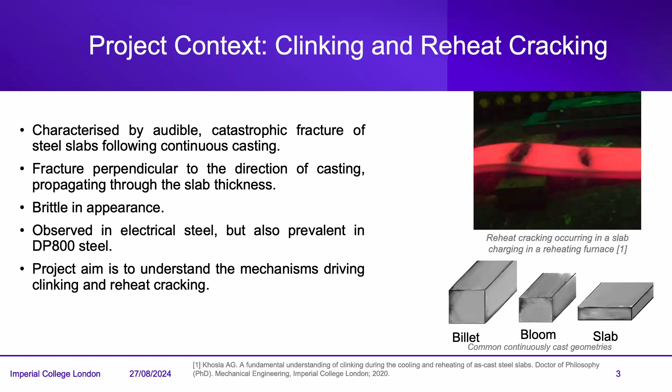And the aim of my project is to further an understanding of these mechanisms that result in clinking and reheat cracking. So, as I mentioned, the phenomenon happens after continuous casting. There are a number of process routes that a slab can take once it's out of the continuous caster. You can hot charge it and keep it at a temperature above its transition temperature. But clinking and reheat cracking often occurs when it's either cooling down in a slab yard or being reheated in a reheat furnace.

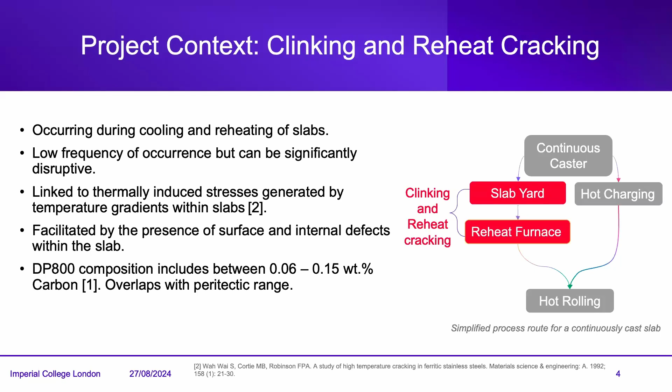So it has been shown that clinking and reheat cracking is linked to thermally induced stresses due to non-uniform cooling within the slabs. And this has a low frequency of occurrence, about 1 in 1,000 slabs or thereabouts. But when it does happen, it can be quite significant. Another factor to consider is that there are casting defects introduced by continuous casting that can be exacerbated by DP800 steel's composition, which can overlap with the peritectic range.

So a bit more about continuous casting. Essentially, you're taking molten steel, you are putting it into a water-cooled copper mold, which initiates the solidification process, and then this is extruded out as the solidification continues. It's guided through. When the solidification is complete, then it's cut to length. And due to the nature of continuous casting, you end up with an extremely anisotropic microstructure.

So on the outside, which cools the quickest, you have the chill zone with the smallest grain sizes that are randomly orientated. But as you move further in, you encounter the columnar zone, which has textured grains that are aligned with the direction of heat flux. And in the middle, you have equiaxed grains, which again are randomly orientated. Grain size wise, you have the smallest grains in the chill zone. The largest grains generally I've found are in the columnar zone, and in the middle, you have the equiaxed zone.

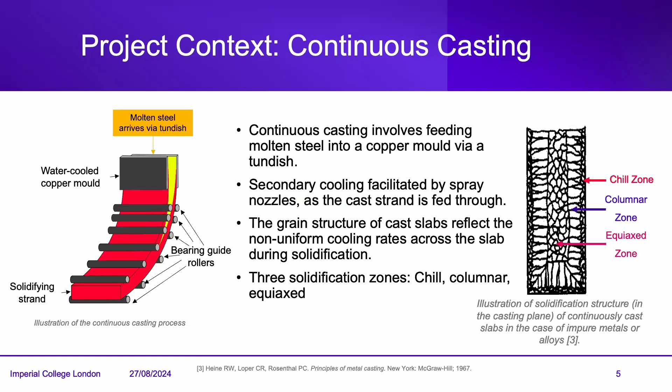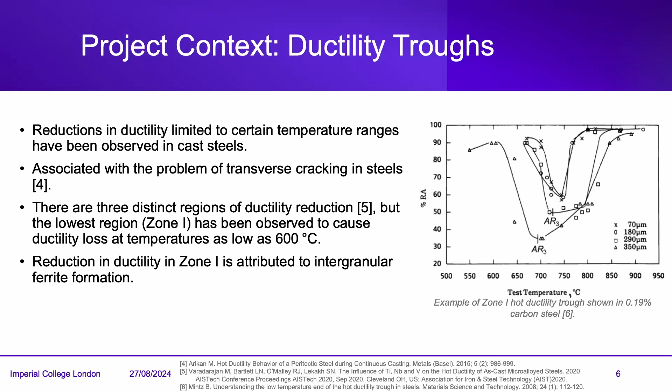Another thing to take into account is the appearance of ductility troughs, which have been known to occur in certain cast steels. Now, these are characterized by a reduction in ductility in a temperature range. There are multiple zones for this, but the one probably of most concern is in the lower temperature range, because this can be as low as 600 degrees. And these can be attributed to ferrite formation upon cooling, which then preferentially deforms and forms voids, which then coalesce and cause intergranular cracking, but it can also be due to grain boundary sliding.

So to summarize the context, you've got a peritectic composition from DP800 steel, anisotropic microstructure due to the nature of continuous casting, which can also introduce casting defects into the material. And then you've got a ductility trough at certain temperature ranges. All of these are interacting in a slab, which is subject to thermal stresses upon cool down or reheating.

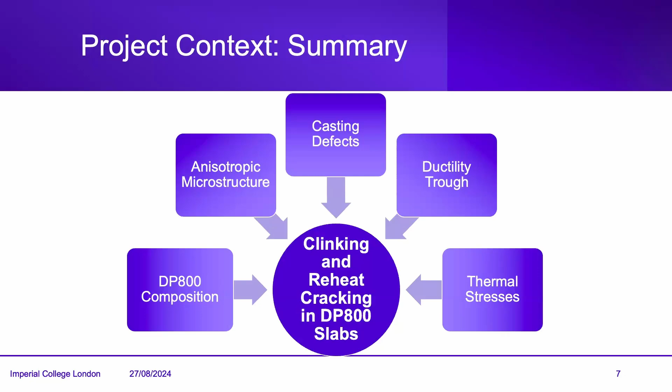So before looking at the fracture toughness properties, it was important to observe the extent of the solidification zones that I've just discussed. So some metallographic work was conducted, and quite a large area of a DP800 steel slab was polished and etched to see the extent of the solidification zones.

And the transition between the chill zone and the columnar zone here is quite clear in the top picture. As you can see, quite small grains, less than 3 millimeters squared, making way for quite large columnar grains, which are aligned.

You can see in the bottom image here, they are aligned with an axis down into the page. Another takeaway from this is that the microstructure of as-cast DP800 is bainitic ferritic. This is to be expected. You can see a lot of allotriomorphic ferrite forming in the grain boundaries. But there is also pearlite forming at the grain boundaries, no doubt because the diffusion rates are higher.

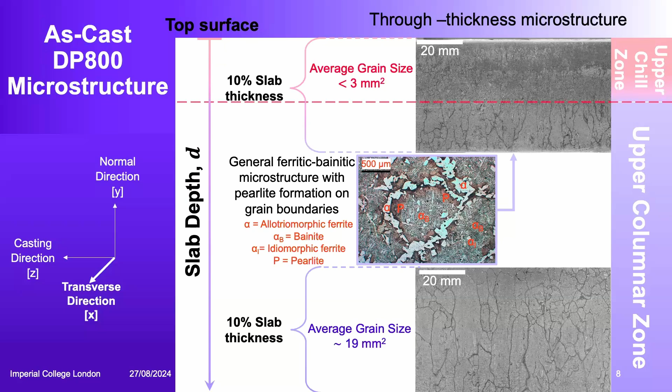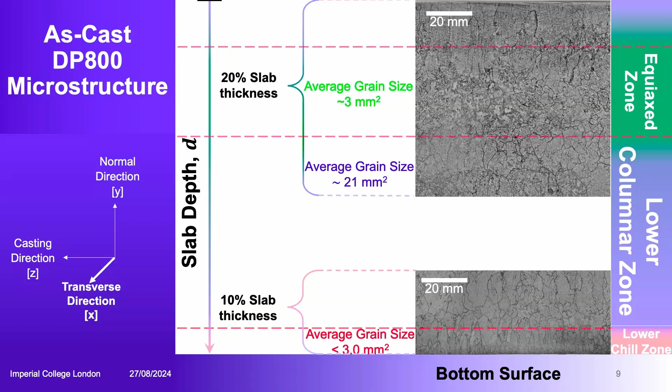So as we move down the slab, the columnar zone makes way to the equiaxed zone, relatively in the center of the slab, with an average grain size of 3 millimeters squared. And then this again moves down to another columnar region and the chill zone in the bottom. So having determined the solidification zones, I was able to extract samples for testing. And that's exactly what I did.

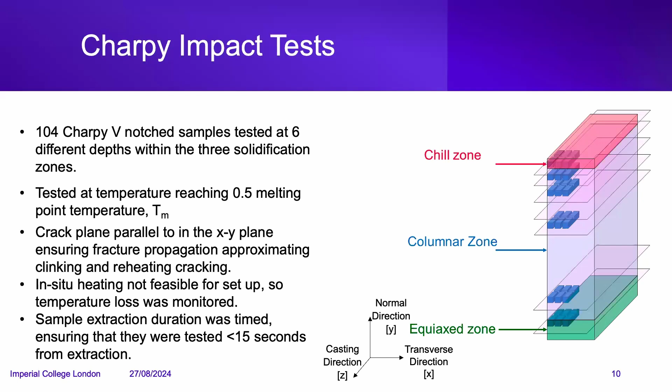Another thing to note is that because in situ heating was not feasible, a temperature loss study was conducted for each of the target temperatures to ascertain how fast the temperature loss rates are and ensure that the tests weren't too far away from the target range.

So results-wise, as to be expected with ferritic or bainitic steel, you can see a clear brittle to ductile behavior happening here as you reach a peak, but you don't actually get an upper shelf due to the effect of thermal softening that happens quite soon afterwards.

And interestingly, the ductile to brittle transition temperature for each of the solidification zones were relatively similar, though you would expect the columnar zones, which have much larger grains than the chill zone, to have higher brittle to ductile transition temperatures. But there's clearly another mechanism in effect here because they are relatively consistent. Now, the actual temperature values have been normalized. Apologies, because they are proprietary information of Tata Steel.

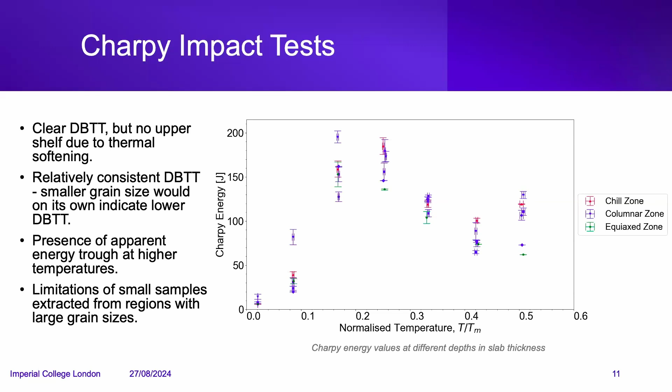But you can also see an apparent Charpy energy trough at about 0.4 normalized temperature here, which suggests perhaps there is a ductility trough effect here, lowering the toughness of the samples. But with Charpy samples, there is lots of variability in measurements, so this does need to be corroborated, which is what I have set out to do.

And so I do have some ongoing JIC testing with 3-point bend SENB samples to test the temperature range up to half of the melting point of the steel as well, and to see whether or not there is actually a ductility trough present in the material. And so far, some room temperature tests here show type 3 unstable pop-in fracture. This is actually relatively common. There has been some work done on electrical steel, and this behavior does show up there.

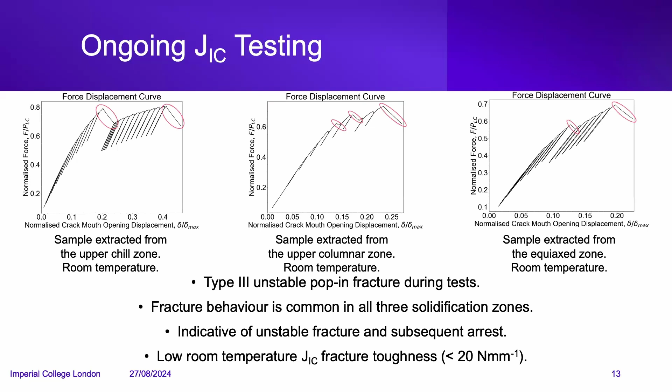But I attribute it to an unstable fracture being arrested by a grain boundary, but more tests need to be done to actually make that a definite mechanism. So the fracture behavior is common in all solidification zones, as you can see from the 3 force displacement curves here, and valid JIC values were able to be obtained, which were low, less than 20 Newton per millimeter. At higher temperatures, preliminary studies are showing, as to be expected, significant increases in fracture toughness.

The fracture toughness is actually more than doubled, about 2.5 times the room temperature values, but you do still see pop-in fracture, though it's not as common and it's not to as high a magnitude. There is a lot of plastic collapse happening for many of the tests that I've conducted at higher temperatures, and the crack sometimes actually does not grow. So that's also an interesting effect of temperature.

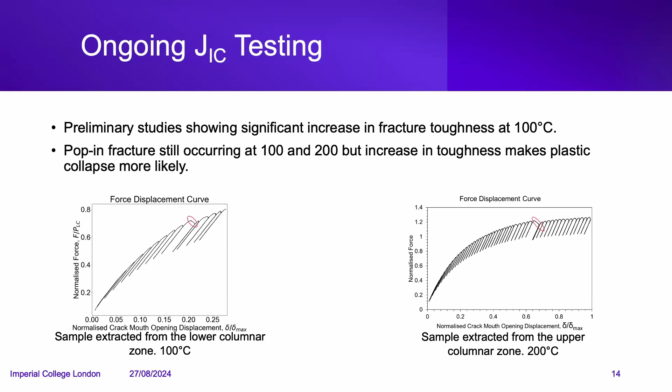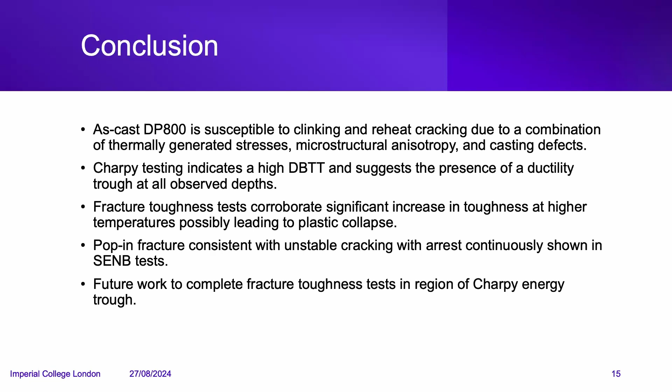But the aim is to complete those tests to the temperature range suggested by the Charpy tests, where a ductility trough may be occurring, to see if that is actually the case. And in summary, Charpy testing is indicating a fairly high ductile to brittle transition temperature, to be expected with the large grain sizes we see, and fracture toughness tests are corroborating the increase in toughness with temperature as well. Thank you. Thank you, Daniel.